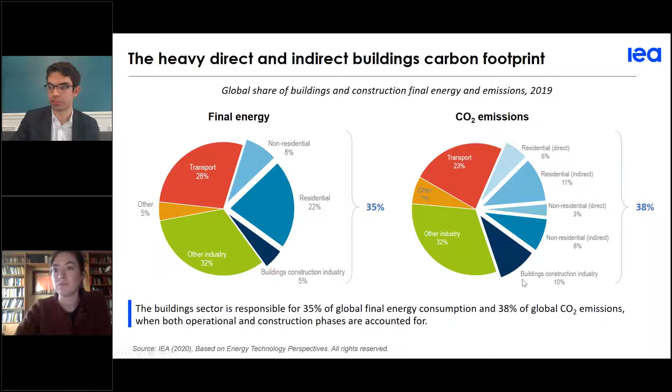So because of the heavy indirect footprint of the building sector, we really want to address the overall value chain emissions. The other thing we need to take into account before designing the strategy is, as Timur mentioned, the legacy of the existing building stock.

So here we have a snapshot of the existing building stock by year of construction for different regions in the world. And we can see that in China, India, and other emerging economies, the average age of the building stock is between 12 and 15 years typically. So it's a very young building stock that will remain and continue to be standing through to 2050, for example.

So here the share of the 2019 stock that will continue to be standing in 2050 is between 30 and 50%, depending on the emerging economy we're thinking of. But this means that a number of buildings are already built and need to be addressed if we want to reach a net zero emissions energy sector.

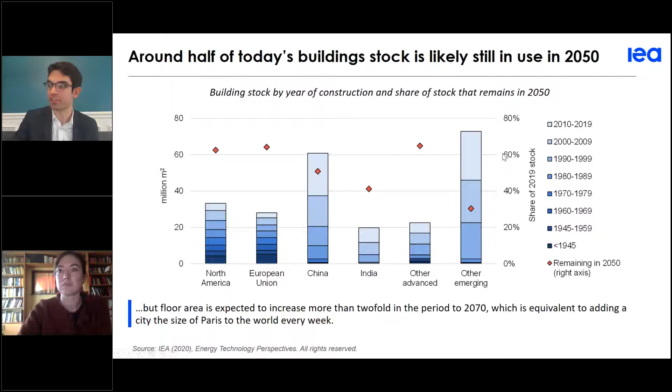For advanced economies, other regions in the world like North America, European Union, Japan, Korea, the share is even higher, although the building stock is older because the age of the existing environment is also higher, and we are assessing that around 60% of the 2019 stock would continue to be standing in 2050.

With that, we defined a strategy to achieve net zero emissions, which relies on 3 pillars. The first one, as Timur mentioned, is that there is a number of technologies that is already available today on markets, and we need to deploy them as soon as possible to trigger the necessary economies of scale and emissions reduction, energy savings, and job creation necessary to address both our climate and economic objectives.

The second one is to integrate buildings to the entire energy system to address the indirect footprint of buildings, because buildings need to support the transition of other sectors, industry and power, for example, because electricity use in buildings accounts for 19% of global CO2 emission, and we can add another 10% related to the use of material for construction and renovation.

And the third pillar of our strategy, as highlighted in our Clean Energy Innovation Report, is innovation, because despite a number of technologies being available on markets today, we still need to increase efficiency of existing products. We still need to expand the scope of the services provided by the products, and we still need to deploy technologies that are not already on the market today, such as advanced cooling, for example, to meet the climate objectives.

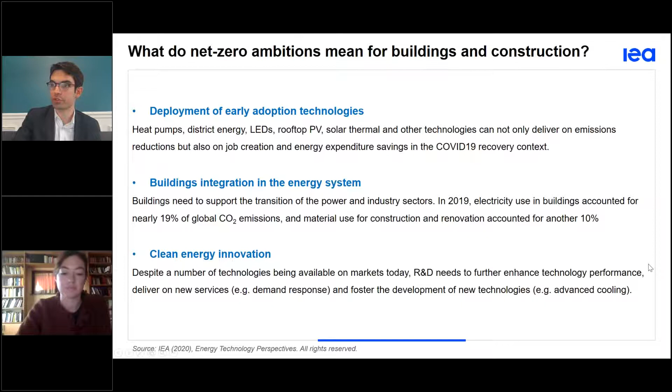So now I leave it with this, and we go through the first point, the deployment of early adoption technologies in light of our sustainable development scenario.

Thank you, Thibault. In this first section, we're going to deep dive through the energy, emissions and technology trends behind our sustainable development scenarios for buildings, focusing on the operational phase of buildings.

The sustainable development scenario is the main scenario of the Energy Technology Perspective 2020 publication and illustrates the evolution of the energy sector and related technology needs to reaching global net zero CO2 emissions for the whole energy sector by 2070. The trajectory is compatible with the Paris agreements and also with reaching the United Nations Sustainable Development Goals more related to energy, such as universal access to energy and reduced pollution.

As benchmark, the stated policies scenario describes the evolution of the energy system on the assumption that existing, announced and adopted policies are implemented. This reflects for buildings into emissions peaking in 2019 and reaching net zero soon after 2060.

To achieve this, at first, we need to decrease the demand of energy of the buildings, looking at the envelope and also the efficiency of the technologies within the buildings. And we will see in the presentation that we have many opportunities to do so. And second, to decarbonize the consumption which remains within the buildings.

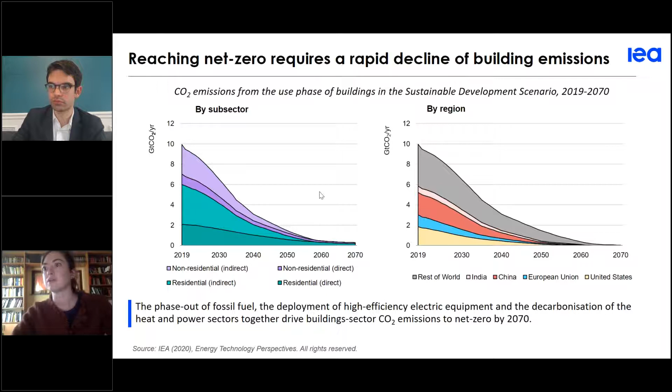Dipping into these trends, next slide please. We see that some key trends can be highlighted. First is the phase out of fossil fuels, in particular coal and oil decline quite quickly. We see this already, especially in developed countries, by 2040.

In emerging economies, we have a growth of LPG and oil derivates to 2030 to guarantee universal access to the service, and then it is replaced also by other cleaner fuels like bioenergy or electricity. We also see that the inefficient use of traditional biomass for cooking or space heating in emerging economies is also phased out by 2030, while the share of other renewables is growing up to reaching 16% of final energy consumption in buildings by 2070.

Two pillars of the transition are electrification. We see that it grows up to reaching 70% of final energy consumption in buildings, driven both by the growing demand for electricity services like space cooling or electric appliances, but also by the greater availability of highly efficient electric technologies, for example thinking about heat pumps or more connected household appliances.

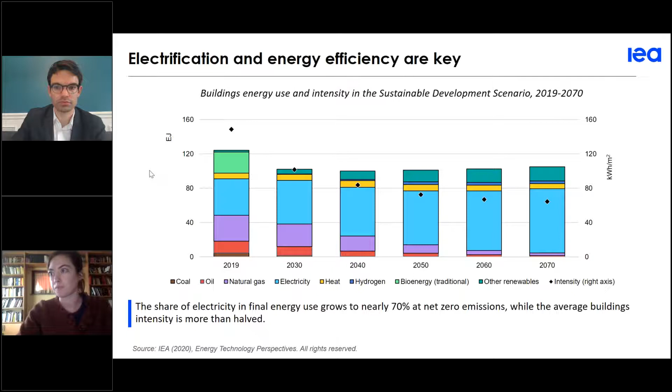Next please. In terms of floor area, this means that we need one third of global floor area to reach net zero emissions by 2040, and this is driven by new construction to have near zero energy buildings as new constructions, and also by deploying deep energy retrofit. To give an idea, we need 4 billion square meters per year of buildings to be renovated, which up to 2070 is equivalent to renovating the whole floor area surface of France.

Having better buildings also allows moving from high temperature to lower temperature systems, which is very important, especially for heating. Heating is a key end use of buildings to be decarbonized, as it is now highly reliant on fossil fuels and is responsible for 45% of buildings' carbon emissions. We see here that by 2070, 80% of the sales for heating in buildings are represented by heat pumps, district energy, and renewable sources, which are the main drivers of the decarbonization of heat.

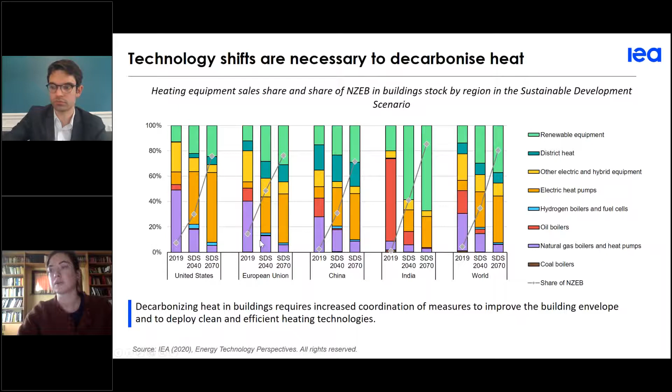This morning we published a commentary entitled 'Is Cooling the Future of Heating?', focusing exactly on heat pump applications and enhancements which can broaden their market applicability in other market segments. For example, taking into account areas with heating only needs, cooling only needs, or both heating and cooling needs. As reversible vapor compression cycles are common to heat pumps, they can provide both services.

Within the commentary, we have a tool in which you can find indicators related to the share of population which needs high, very high, low, or moderate cooling, heating, or both heating and cooling needs. Associated with these indicators, there are also other indicators related to the market potential for heat pumps, as well as the CO2 savings that can be achieved by these technologies compared to conventional alternatives.

We see that there is a growing penetration of heat pumps in the heating market, but today the great majority of heat pumps are sold for space cooling as air conditioners, and most of them are reversible. Space cooling is the fastest growing end use in buildings, and with rising population, increasing income, and also rising temperatures, we expect this end use to continue to be the fastest growing end use in buildings.

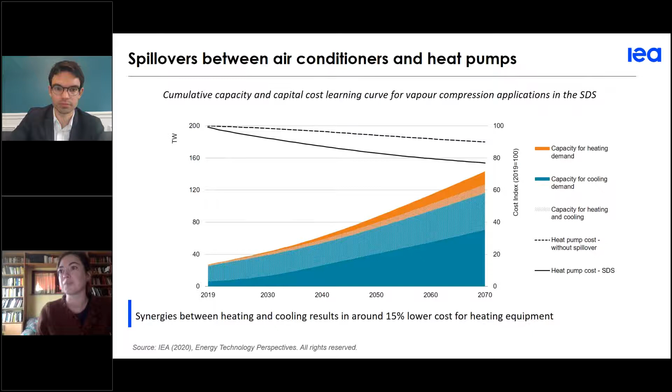In our sustainable development scenario, these spillovers or technology transfer across different types of heat pumps and air conditioners can lead to a capital cost reduction of reversible units of up to 15% by 2050, and this facilitates larger uptake of reversible units also in the heating market. We see it as an enabler to having heat pumps as the dominant heating equipment by 2050.

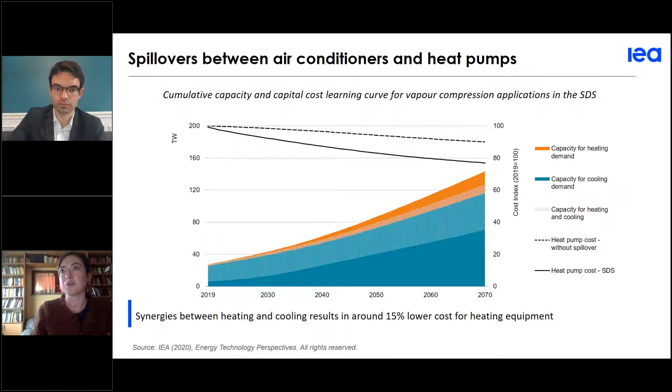Now back to Thibaut to see buildings integration within the broader energy system.

Thanks a lot, Chiara. So this was about clean energy deployment, the first pillar, and we are going to dive into the second pillar, integration with other parts of the energy system, starting with power. And before looking at that, let's look at the broader context and explain why this is a must.

So electricity demand will be growing in our sustainable development scenario, and this will be met by intermittent resources. If we're looking at the electricity generation mix today and in the sustainable development scenario through to 2070, we realize that the current capacity met by fossil fuel assets is gradually replaced by low carbon hydro, bioenergy, and nuclear assets to be able to decarbonize electricity generation.

But the main trend we see for electricity generation is the rapid ramp up of variable renewables, which dominate the electricity generation mix in 2070 as emissions reach net zero at this year during our sustainable development scenario.

Looking at what is driving this growth, we have, of course, buildings that contribute today to around 55% of global electricity use. This share will be declining through to 2070 with the electrification of transport and industry, but in absolute terms, we see an increase in electricity use despite energy efficiency gains that are fully tapped into in our sustainable development scenario.

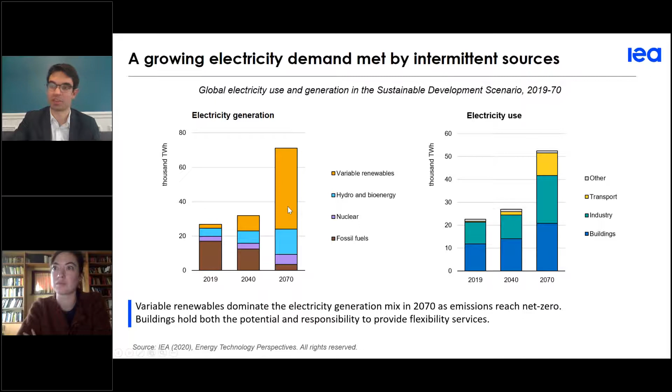We analyzed different drivers for electricity demand growth in buildings, and cooling was one of them. So as part of the article that Chiara mentioned, where we see the maps and the synergies between heating and cooling strategies,

we also have a dynamic chart that we can play with that shows the average number of air conditioners per household by country relative to income per capita, relative to the year from 1990 to 2070, and also relative to an indicator that shows the impact of climate on air conditioning ownership, the heat index cooling degree days. So basically on this chart, to simplify, each bubble represents one country.

And the bubbles range from blue to red, where blue means a quite cold climate relative to red, which will be a warmer climate.

And we see a really rapid growth of air conditioning ownership in emerging economies that are very hot and humid in particular, with the US, China, India, Indonesia, and Brazil being the main air conditioner markets in 2070.

So higher efficiency for the technologies combined with passive measures to reduce service needs will contribute to halve electricity demand for cooling relative to baseline trends, our stated policy scenario, sorry. So efficiency is the first lever to address the impact of buildings on electricity systems.

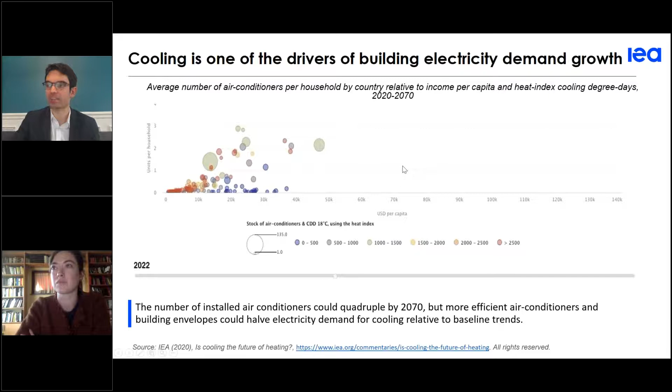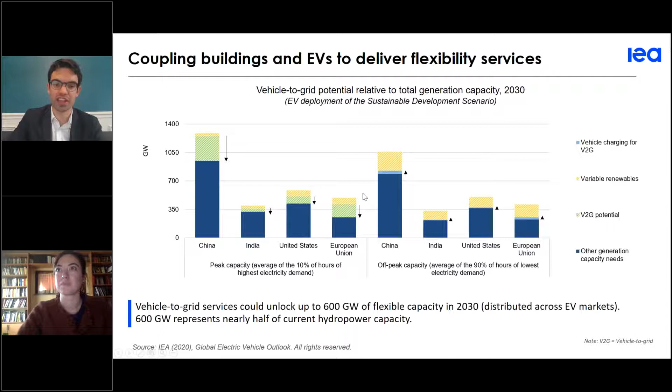So this was a quick, brief snapshot about our analysis and the integration of buildings with power systems. And without further delay, let's move on to another area where buildings will need to break historical silos and support the transition of another sector. And I'm talking about material manufacturing industries here.

So why is that? Because embodied emissions, or the emissions from the manufacturing of buildings construction materials, have increased a lot over the past 2 decades. We are here mainly focusing on steel and cement, since they represent more than half of total embodied emissions. So here you can see the embodied emissions related to cement and steel, and we see more than a doubling for steel, and an increase by more than 50% for cement just over the past 20 years.

And the main driver for this growth was floor area. Floor area that expanded quite dramatically between 2000 and 2019. In China, for example, we added 30 billion square meters. So it doesn't mean anything, but that's today's surface built of the United States. So we basically added the surface of the United States to China over the past 20 years. And this has contributed, of course, to dramatically increase the embodied emissions related to cement and steel manufacturing globally.

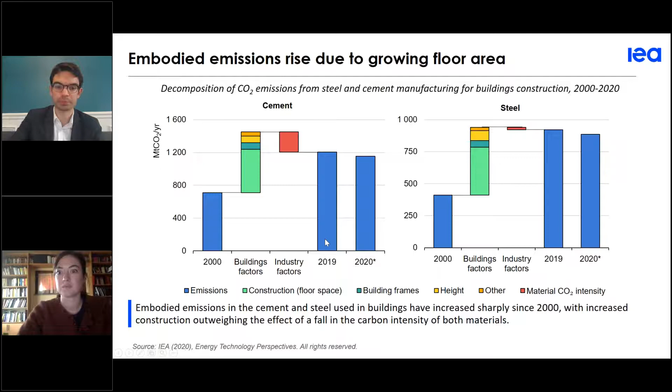Construction activity fell in the wake of the pandemic. That's true, and especially in China, for example, housing completions decreased by nearly 15% in the January to April 2020 period relative to the January to April 2019 period. And we estimated that on average for the year, we will see a decrease of around 5% of construction activity in China. But this number can be higher in some parts of the world, for example, in Europe.

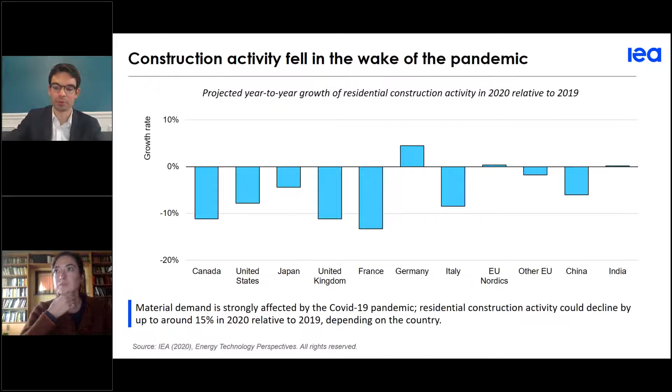In April 2020, Europe recorded a decline of 25% of construction activity compared to April 2019, and average across the year. In some countries, here we see France and the UK, for example, we see a decline rate of 2 digits, so lower than 10%. These are estimates, of course, because it's 2020 data. This still needs to be refined, but it's just to give you an order of magnitude that actually we think that embodied emissions may decrease by 5% annually in 2020 relative to 2019, and that this 5% is actually less than the average annual growth rate of embodied emissions over the past 20 years. So still not on track with the pandemic.

Embodied carbon is even harder to abate than use phase emissions. At least this is how this was presented in the report. Since we had a decline of direct emissions from buildings, coal, oil, and natural gas, for example, by I think more than 50% by 2040, as Chiara highlighted in the trends for the sustainable development scenario. Electricity and heat is declining even faster. And for cement and steel manufacturing, it's also declining, but at a much slower rate, which is why the contribution of cement and steel manufacturing to total buildings and construction emissions is increasing, starting from, I think, 18% today to more than 40% throughout the modeling period.

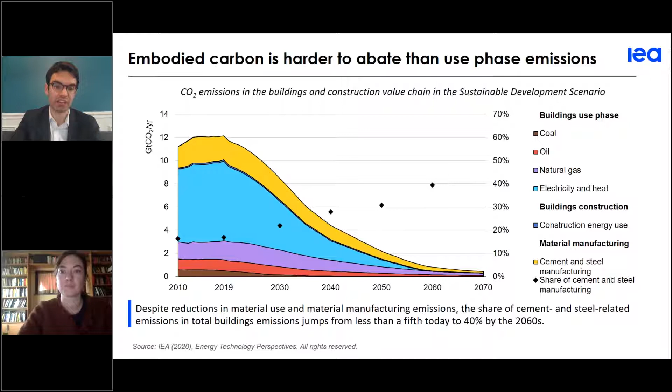Which means that this is something where material efficiency strategies, so reduction in the use of material for buildings construction and renovation, can really play a huge role so that it alleviates the burden placed on the material manufacturing industries. And we've quantified this potential. So here, sustainable action needs to be stimulated along the value chains because material efficiency strategies contribute to around a third of the total reduction of emissions by 2070 in the sustainable development scenario relative to the Stated Policies Scenario. This is what you see in the colors here.

The trajectory follows an uneven path, knowing that the contribution of material efficiency strategies increases quite rapidly through to 2050 before saturating because of the contribution of lifetime extension, of which renovation is key. And by 2050, basically, most of the existing building stock is renovated under our scenario, meaning that the impact of renovation is not growing anymore after 2050. That's why we have this uneven path.

But we've looked at the overall building's life cycle, taking into account the whole life approach, starting at the design phase, for example, with strategies like structural optimization, innovative designs, composite framing, as well as prefabrication, precasting, use phase with building repurposing, for example, to extend the building's lifetime and avoid tearing buildings down to rebuild them after, because construction companies actually told us that a renovation would require 40 to 80 times less materials or resources in mass than tearing a building down and building it again.

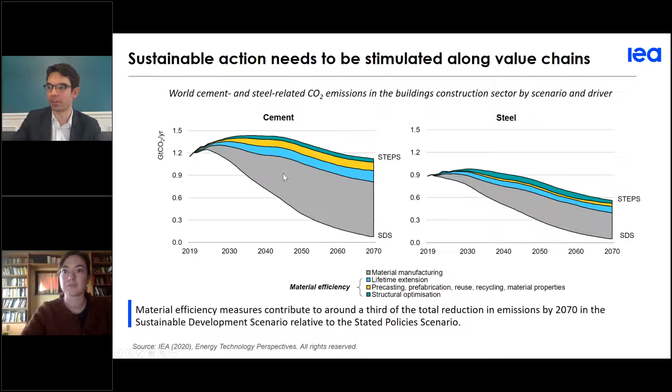And we've also looked at the end of life of buildings, so managing waste, reuse, recycling, using digital tools all along these processes to increase and tap into the full material efficiency potential to come up with a whole value chain and life cycle strategy, hopefully. So now let's move on to the third pillar on innovation with Chiara.

Thank you. In our reports, we've seen that innovation plays a strong role in the transition to net zero emissions. The good news for buildings, next slide, okay, is that the reduction of emissions is going to be driven by technologies that we already have in the market. In particular, 70% of the cumulative emissions reduction from the sustainable development scenario to the Stated Policies Scenario can be achieved by technologies that are already market available, with a progressively increasing role of early adoption technologies.

The remaining 30% of emission reduction will still require innovation, for example, thinking about integrating active components within the building envelope, which will allow to generate energy exploiting the whole surface of the buildings and not just the rooftop, or, for example, thinking about flexibility options and storage integration. Next, please.

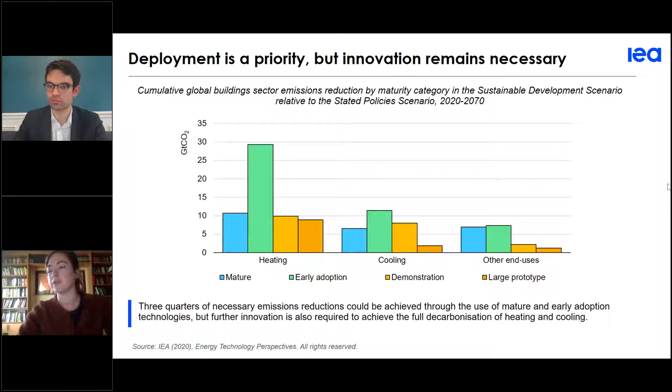To support this analysis, we developed a guide, the ETP Clean Energy Technology Guide, which maps over 400 individual technologies and component designs within a framework which is interactive. And for each technology, you can, of course, see the description of the technology, the level of maturity, indication on the role we see it may play to reach net zero emissions, and also indications of leading actors and initiatives in the field, and deployment targets if available. For buildings, we described more than 100 technologies.

Here you see the 4 categories, so construction and renovation, heating and cooling, lighting, and integration with power system. And of course, this is aggregated from the 100 technologies. Next, please.

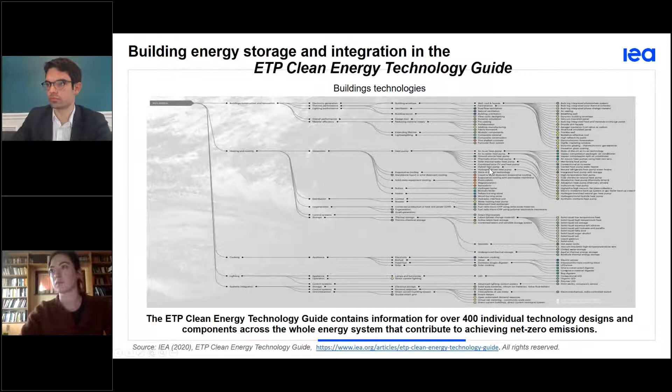Coming back again to heat pumps, we have seen before that there are still potential enhancements, and that technology learning across the different types can really accelerate the deployment of technologies which are still in the innovation pipelines. Especially, we see 4 major areas for enhancements for these technologies. First is to tailor heat pumps to specific market segments and operation conditions. For example, thinking about cold climate heat pumps, or heat pumps to be deployed within multifamily buildings where there are a variety of demands, or also as part of renovation packages.

Second is to enhance the integration of heat pumps within the other parts of the energy systems, for example, with the electricity grid through demand response, or the integration with storage, with renewable assets, for example, with solar or other renewables, and also within low temperature district energy systems. So, for example, thinking about district heating and cooling networks. Third is to improve heat pumping technologies operations, for example, having them operate efficiently at partial loads, or also to be able to simultaneously produce both cooling and heating.

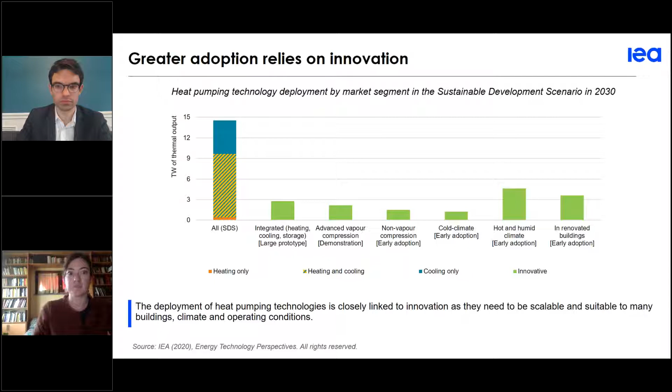And the last point is to develop innovative solutions for cooling, which can address specific areas such as hot and humid countries, for example, through hybrid components. Next slide, please.

Broader on the building sector, we identified 3 areas in which innovation can deliver benefits. First is to deploy packaged multi-service solutions, which can enable to exploit the synergies that different technologies combined can deliver. For example, thinking of the standardization of some processes, or the standardization of renovation models. And this can deliver improved performances, and also the necessary cost reduction to have these clean energy technologies deployed.

Second is to integrate different end uses. So, for example, to exploit the synergies which several end uses can provide when combined. For example, thinking about using the waste heat from air conditioners to produce hot water, or also to combine heating and cooling networks. And the third one, we have already seen in previous slides, is to deliver solutions which are tailored to the several local conditions which are present in our building stocks.

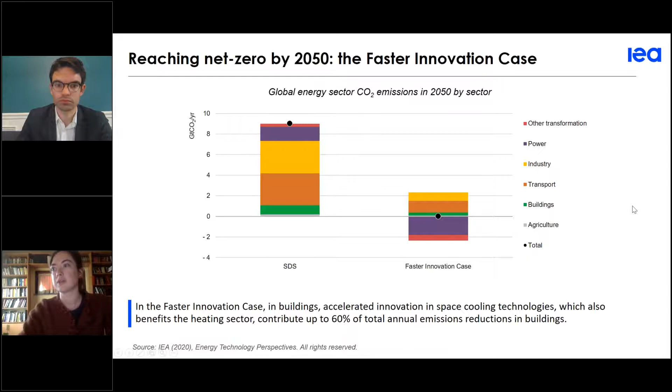So to conclude, next, please. Five key points for conclusions. We've seen that it is very critical to tackle emissions from the existing buildings. Buildings, as Thibaut said in the beginning, have very long life cycles, and many of the buildings that we already have today will still stand in the future. So it's going to be very important to decarbonize those and to deploy deep retrofit policies for those.

Second is to strengthen the market for clean energy technologies at the early stage of adoption. We've talked a lot about this before. So governments need to incentivize and accelerate the deployment of these technologies, and in particular, it's very important that the cost gap is reduced compared to traditional technologies. And for this, there are several market pull instruments which are available, but there is also additional need for research and development when these technologies start to be adopted.

Third is to develop and upgrade infrastructure that enables technology development. All these clean technologies that we've mentioned in buildings, but also in the whole energy system, are not coming alone, and require associated infrastructures, which might require upgrades or new investments. Let's think, for example, of smart grids, or the connectivity of appliances, which will require several infrastructures. Or let's think about district heating networks, which now operate at high temperatures and will be required to move to lower temperature operation and integrate with cooling networks.

The colleague indicated that in the presentation we mentioned around 150 gigawatts of overcapacity of renewables needed if seasonal imbalances in cooling and heating needs are to be covered. They asked whether we could elaborate on this, show that specific slide, and explain how we could resolve that problem. Perhaps Thibaut can elaborate a bit further.

Thanks, Rosalie. Indeed, there are a couple of solutions, some of which are scalable, to address this imbalance between cooling needs and renewable generation capacity. The 150 gigawatts represents the difference between peak capacity and the average peak capacity. Among the solutions, we could have individual solutions, for example compact systems with ice storage in the case of cooling, or heat batteries if we did this analysis for heating as well.

There are a number of research projects and prototype products being developed, some as part of our technology collaboration programs on heat pumping technologies. I recall one annex looking at a comfort and climate box for different countries and climate zones, testing prototypes for cold or temperate countries with little space in the apartment, or space constraints at least, trying to develop a compact product that could be flexible, integrate digital tools that learn from people's behavior, and respond to signals from the electricity provider — one for cold climates and another for hot and humid climates.

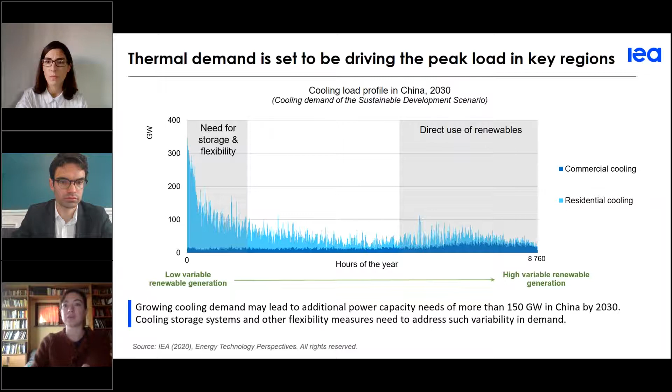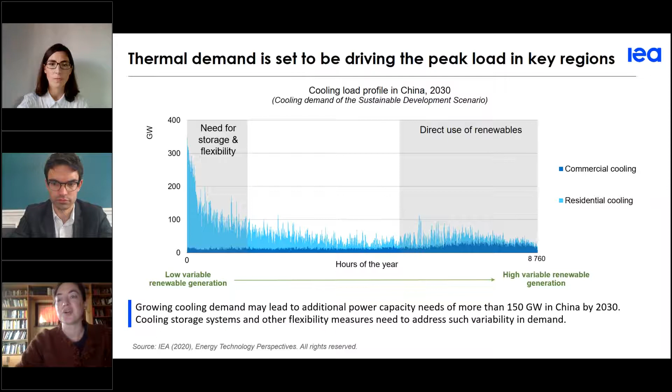So in our scenarios, we couldn't really take into account occupants opening and closing windows, but we assumed that occupant behavior was aligned to technology needs. For example, acting on set point temperatures, which of course affects comfort conditions, but reasonable set point temperatures.

And we also assumed behavior change in the sense of a shift towards more efficient and cleaner technologies. On the other hand, we also assume that digitalization and smart technologies, as well as improved buildings, will help guarantee these comfort conditions without requiring too many actions from the occupants, as is the case today.

Of course, the behavior aspect also links to the awareness of consumers and the education and training of those who install the technologies, to make sure they're installed correctly and the user can operate them correctly, and additional policy efforts are needed in this direction. We will have a section in our panel discussion later focused exactly on this topic, so please stay tuned.

Thanks, Chiara, very helpful. There are a couple of questions related to embodied carbon in buildings, more related to the discussion on the transition in the manufacturing of materials, touching on the fact that we expect a large share of global demand for materials to come from developing countries that could have more challenges accessing and deploying clean energy technologies for the manufacturing of those materials that would help the transition of the industrial sector. So I think there were some questions around which extent we've considered these aspects.

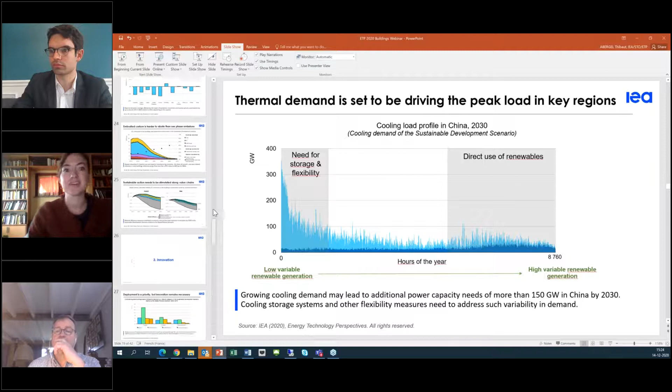Yes, thank you very much, Araceli. In this panel discussion, we're going to discuss how to accelerate the transition towards sustainable buildings, and we're going to look at it through different perspectives of our great speakers. Please turn on your camera when mentioning your name.

So we have here already Henk Kranenberg, who is a senior manager at the Environmental Research Center Daikin Europe and the vice president at Eurovent board. He has great experience on energy performance of buildings and indoor air quality, energy-related products legislation, F-gas legislation, standardization issues on products and building systems, and also safety and sound restrictions for appliances. Welcome, Henk, to the discussion.

We have Cécile Faraud, who leads the Clean Construction Program at C40, the network of world's megacities committed to addressing climate change. Her team supports cities in reducing embodied carbon and shifting the construction sector towards a decarbonized, just and inclusive future. She advocates for a whole life and circular approach to our built environment. Looking forward to hearing from you.

We have Luca De Giovanetti, who is Manager Science-Based Targets at the World Business Council for Sustainable Development. He leads the decarbonization work streams, part of the Transforming the Built Environment project, aimed at accelerating the achievement of net zero emissions across the entire built environment life cycle through system-wide collaboration. Luca is also part of the Science-Based Target Initiative Technical Advisory Group, as well as the Net Zero Expert Advisory Group. Hi, Luca, welcome.

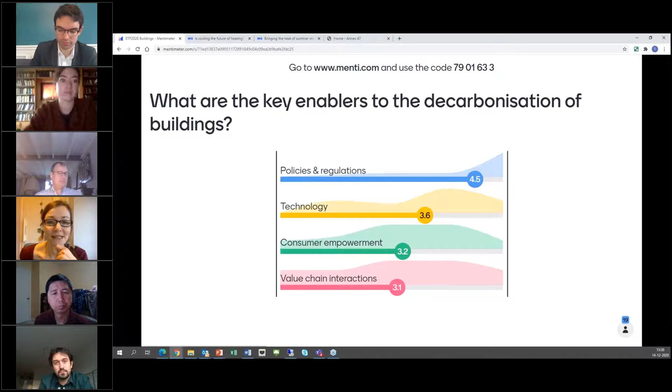It has now more than 100 signatories, including 26 cities, 6 regions, and 66 businesses. It set targets for 2030 of net zero carbon new building by 2030, net zero carbon for all building by 2050, plus an extra addition that most C40 city signatories have opted to take, which is basically on owning, occupying, and developing only net zero carbon municipal buildings by 2030. That's really a way that cities can take action on what they have direct control of.

We have some examples. On new buildings, some of the leading cities are Vancouver, implementing zero emission building plans with bylaws and other regulation for new buildings, and carbon neutral city buildings programs including energy benchmarking for existing buildings. We'd also give a shout out to South African cities developing policies and bylaws for new buildings. New York is a great example of a leading city that looks at existing buildings and retrofits, potentially developing local interactive maps to demonstrate how buildings are performing, which is one of the key barriers. Copenhagen is doing great on its municipal stock, for instance. But that's all on the energy aspect, the operational use of buildings.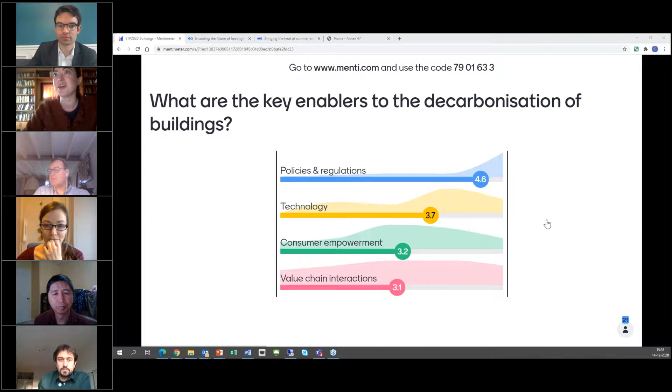Yeah, let's talk about consumers. They live in our buildings and also in our cities, and they're the core of technology choices, and also they do interact with this technology, so they strongly impact the energy needs of the buildings. So we would like to hear how consumers can be empowered to participate in the building's energy transition. And also we have another poll for the audience to prioritize 4 measures: awareness raising, peer-to-peer energy trading, demand-side response, and energy service companies.